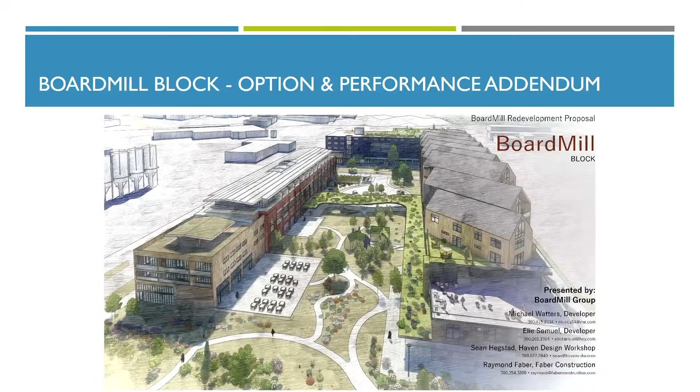So just as a reminder, this is an option to purchase, resulting from the RFP process where we had some submittals and ultimately selected the Board Mill Group. It's a very similar setup of the option framework as we have in other agreements in the waterfront with Harcourt and Millworks, which is actually a subsequent action item on the agenda today.

This one's a little different in that there are 3 distinct phases or projects within this option, covering about 5 acres. For reference, the terminology we'll use is the Board Mill Hotel, the Board Mill Residential, and the Board Mill Park buildings—those are the 3 elements or phases.

This is an option to purchase along with a performance addendum, very similar to the Millworks option we agreed to last year. It has a step-by-step process where the project proponents will bring forward a concept, which comes to the commission, then goes through the city's design review process. Any changes from that will come back to the commission for subsequent steps, until there's finally a final permitted project that goes along with the purchase and sale agreement, at which time we'll consider an actual property sale. I'll walk through those steps in a little more detail in a second.

One piece to consider here is that these projects can be submitted together or in individual phases. We anticipate the initial package submitted will be for all 3 projects, to show how it functions together as a concept. Going through the city's process will likely be more individual, on a project-by-project basis, for the hotel, the residential, and the park building.

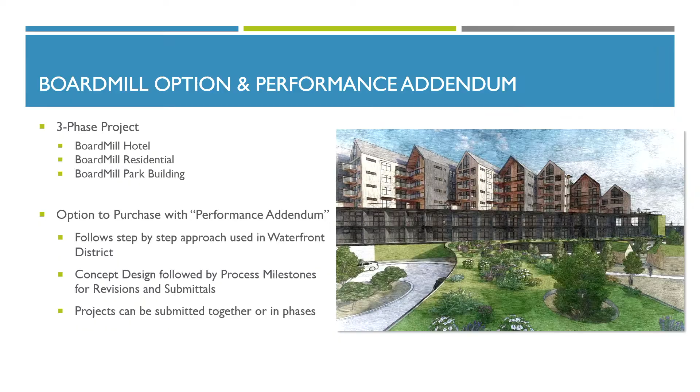And then we've got some timelines that are associated with that, which I'll go through here as well.

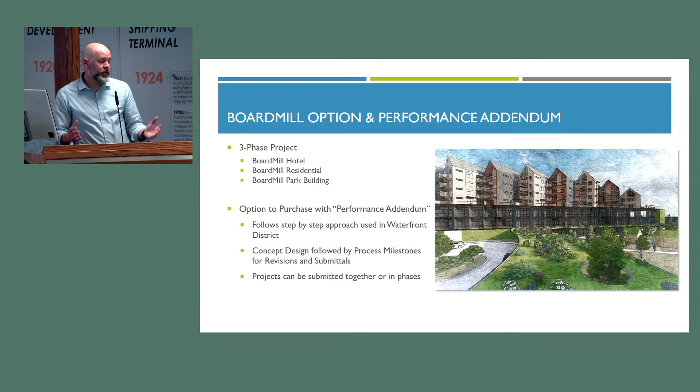So Brian, given that there's 3 phases, are there going to be 3 separate land sale transactions? That's right, that's anticipated. They could be packaged, maybe 2 of them come together at the same time, maybe there are 3 individual sales. But that's the way the option is set up, it has the flexibility to do that. I anticipate some could be packaged, but the timing of the park building, for example, probably has a little more complexity to it. Working with the city, we may have some agreements with the city we have to work through that may change the time frame. But if that all gets worked out and we can do them all together, that's an option too.

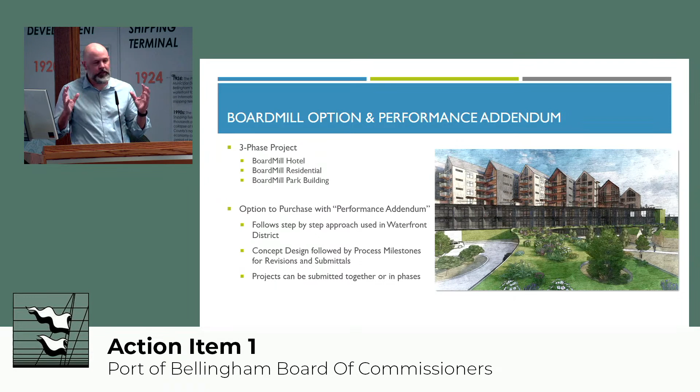So some of the elements included in this are the land valuation. Consistent with the other agreements and appraisals we've had in the waterfront district, we have a $25.50 per square foot value currently, with an adjustment annually at 3%.

The option term is through June of 2027, with the provision that if there's any land use appeals from a third party that's outside of our control or the Board Mill Group's control, that option could be extended for a couple of years, since that'd be outside of our control. It seems unlikely to us. We haven't had any appeals on any of the projects to date, but it is something that could happen through the city's process.

One of the requirements, or agreements I guess I'd say, that we came to was that this was a soft branded hotel. We issued an RFP for a boutique type of hotel. We're trying to avoid a splashy, flashy Holiday Inn feel in the downtown waterfront, but really have it be more integrated in the fabric of the downtown feel we're trying to get. There's a variety of ways that could be accomplished, through an independent operator like Bellwether, or some soft brands that are just kind of subtle, associated with the more major brands. Both of those would work, but we wanted to make sure we're all agreeing what the idea is before we get too far down the road, and that's a piece of this.

There's a $60,000 option fee associated with this. If each project goes forward, that would be credited at $20,000 per project back to the purchase price. But there's a certain date that if the option is not exercised, that would be retained by the port.

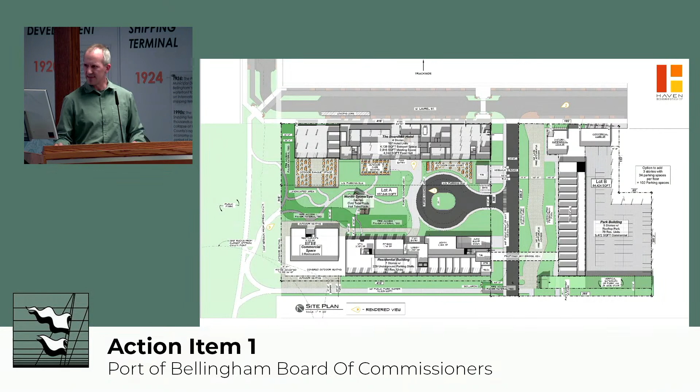So I'll walk it through, starting with the Board Mill Hotel. It's pretty straightforward. The idea is that the Board Mill Hotel is going to be an existing Board Mill building. We're looking at expanding toward the park, and in that expansion area we're putting meeting rooms.

We're putting a banquet hall with about a 300 occupant load, and directly adjacent to that on the outside, we're also putting outdoor areas for gathering, which is a lot of fun. Additionally, in that building we're going to have a restaurant bar, which will also spill out to the courtyard in between the two spaces.

That faces south in general terms, kind of southwest a little bit. We're also going to have a large marketplace, as we're calling it, with some food vendors, craft vendors, and other things. That's going to be about 8,000 square feet, and we're really excited about that piece.

That's going to be directly across from trackside, so you can see that public walk going across there. We'll have access into that area right off of there, so we think that's going to add to the ability to activate that space and activate the port, which we're really excited about.

In addition, the Board Mill Hotel itself is going to be four stories. We're looking at adding an intermediate floor between the current second floor and the ceiling, and then we'll add a top floor, which is the fourth floor. So there'll be about 107 total rooms, and it's just going to be a nice space.

We're looking for kind of an industrial timber feel for the space that matches the area, the location, the history of the site, and we're really excited about that. So that's the first building we're going to be doing.

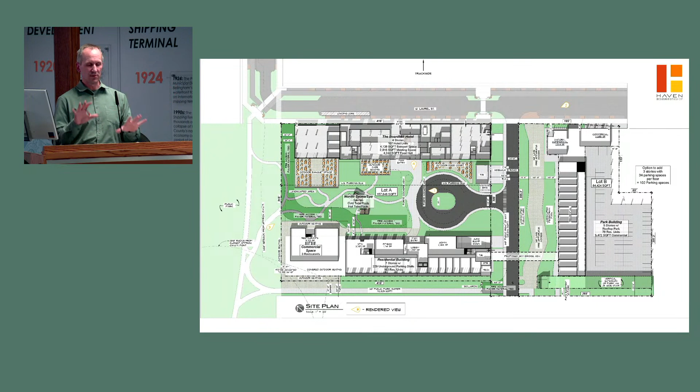That building, plus 9 parking spaces on the roundabout, is going to provide enough parking per city standard for that project without the park building, which was important for us to get underway so they could go separately without problems down the road. We made sure we could accommodate that with our design concept.

The park building is kind of the last building. We will have a sky bridge on the second level over to the residential building for additional parking access, and that will be a significant amount of parking. We have 79 units of apartments, and anywhere from 330 to 438 parking spaces in there.

The best part of that part of the project is the large stair to a public park that's going to be privately owned, privately maintained, but it'll be a public park. That's currently one of the things we need to talk to the Parks Department about, how to structure that and what it's going to look like. But from the talks so far, it sounds like they're okay with the concept and overall idea.

I'm going to continue on to more slides. Before you leave that - are there no parking requirements for the hotel?

Yes, but we can accommodate that underneath our residential building. So you don't have to put in parking for a hotel, but... You do? Yes, for the hotel, I'm just saying there's sufficient parking on that portion of the site for both buildings. So for the city requirements for the hotel, you need half a car per room.

That's their standard. We don't think that's enough, but that's why we're building additional parking for other things. We will meet the city standard with that requirement, so that's around 50 spaces for the hotel at minimum, plus those needed for the residential - about 170 some spaces additional.

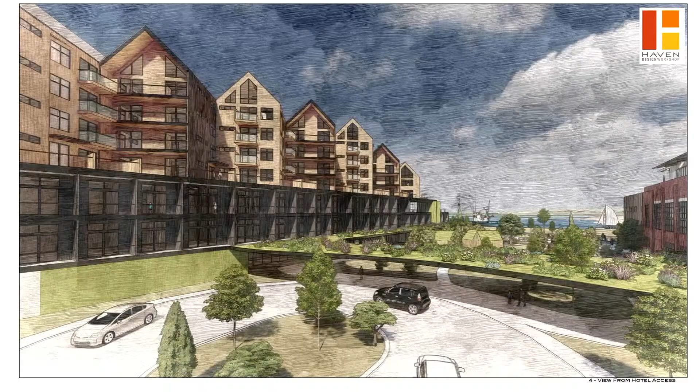And 0.75 parking spaces for the studios? Yes, these might be more realistic at that. And here's some renderings, so you can see the residential building there, the porte-cochere between the two structures, a nice drop-off, dry area. We're gonna plant that quite well, and then you can see the water and everything else beyond.

Are you going straight to condo with those, or apartments first? No, we will not. There'll be apartments.

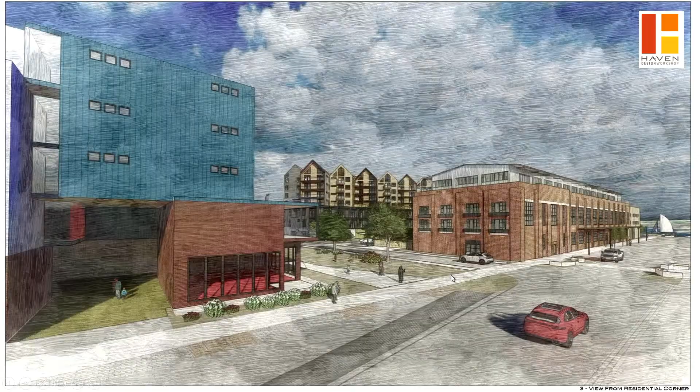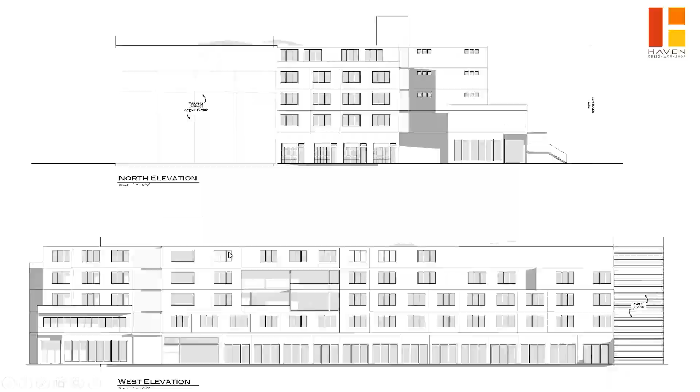Here's another view from the street, and we're looking at the hotel building, the residential beyond, and then the park building. Initially we were looking at doing the access to parking here. We're probably going to change that with some discussions, but we haven't finalized those. We just feel it's too tight and too close to the railroad tracks.

Otherwise we would have to do a right-in, right-out right next to the train tracks, and we felt there was too much conflict there. The city did not say it was a problem, but the more we thought about it, we don't think that's the best option going forward.

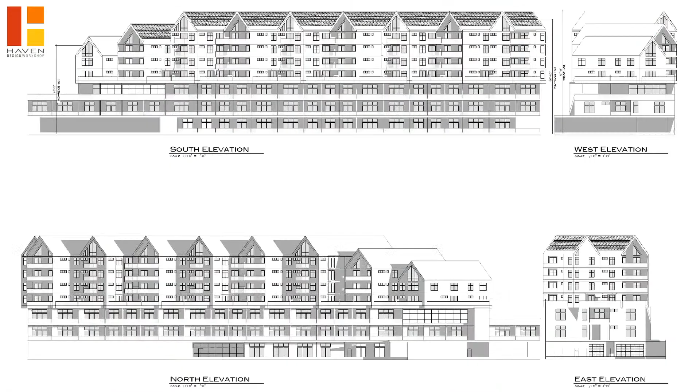So that's just a general overview, and I think that's the end of the slideshow. If you have any questions, or like, go sit down.

So in the board mill building, you're going to get 4 floors, 3 in the existing building. How are you going to deal with what looks to be a problem with the windows on the 3rd floor—you'll either have a short ceiling height on the 2nd floor? That is correct, yes, it's going to be around 8'6" ceiling in there. Okay, so not too bad.

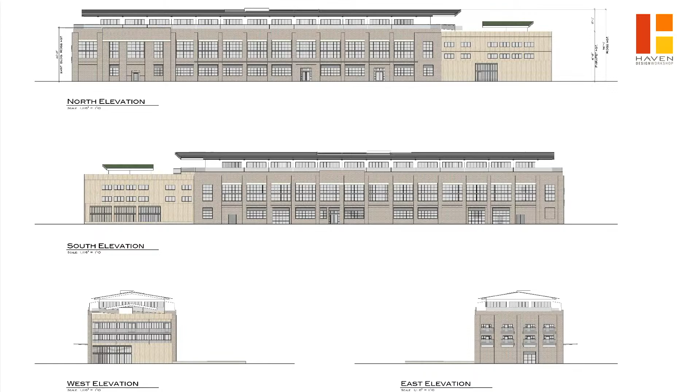Yeah, there'll be an intermediate—let's see if I can show a picture of that. You can see lightly there's an intermediate line going through there that's going to capture that. So there'll be kind of an industrial window system, sometimes with a horizontal line and sometimes a vertical line where walls intersect it. We're looking at maybe channel steel or something exposed on that end. Yeah, it's not as high as we'd like, but trying to work with the structure and keep costs reasonable, we're going to keep it at that point.

And for the restaurant, in terms of public spaces people can use for restaurant, bar—run me through those again. There's the food court. Yeah, the marketplace, which is about 4,000 square feet, will have food vendors. We're looking at a variety of vendors as options, and we may also have craft vendors, artisans, and other things going on there. Let's go back to the site plan, I'll show you.

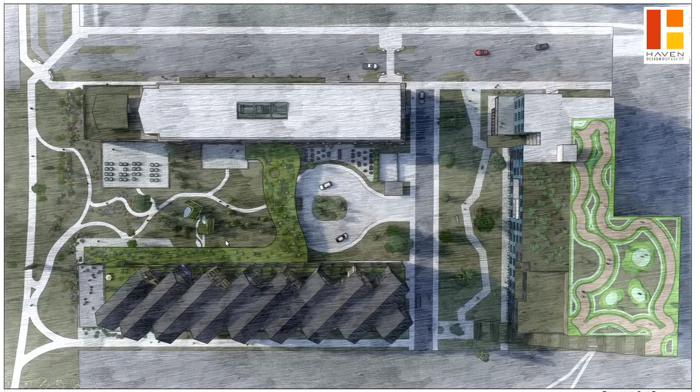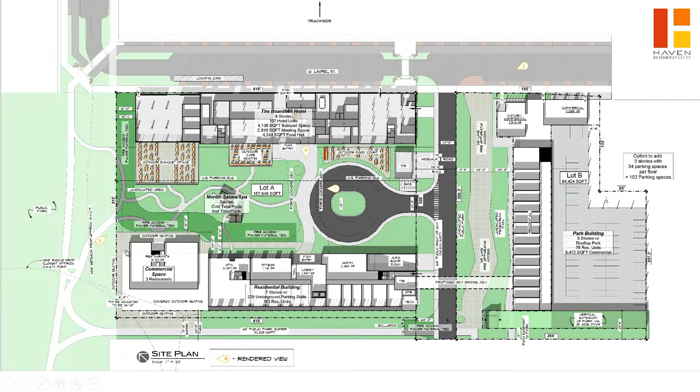So this is outdoor eating space for that marketplace as well, facing south, which is a really nice outdoor space. The restaurant inside the hotel itself will have an enclosed space here, with a potential spill-out area on the hotel building. There'll be additional space on the residential building that's not finally programmed, but there may be restaurant or other items we're going to put in there.

Any other questions or comments? It's just nice to see that the residential part is taller than the board mill building, so you get a little protection from our predominant weather in the wintertime. That'll be nice for folks in the courtyards there. But other than that, it looks pretty exciting.

All right, thank you. Thank you.

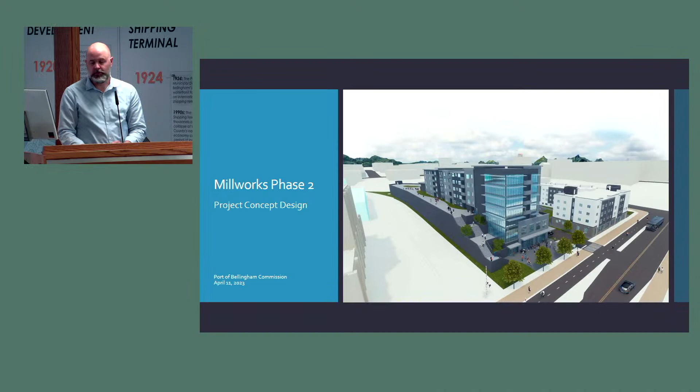I'll start to walk through that. This is for the Phase 2 project concept design, which was submitted to us on March 31st by the Millworks group, another great group that's been good to work with. We met with them multiple times on their design team about how they're incorporating some of our initial comments on things we had concerns about, which they've really addressed. I'll talk about some of the elements they've included in this concept.

As a reminder, similar to the purchase option we just went through, they have a phased approval process, as does Harcourt. The first submittal is the project concept design - that's where that yellow star is, that's where we are right now. So it's for early first concepts, but ready to start working with the city on their design review and land use permitting. The first action pending commission approval is that we would issue this authorization to proceed.

We would work with them on a site access agreement so they can get in there and start doing more design work, getting their geotechnical work, their civil survey, that kind of thing. They will then also submit a land use application and design review package to the city of Bellingham, which includes the city-led public process. Once they've gotten their comments back and any revisions made, they'll come back to us with a more detailed project development design submittal.

Once that is approved by the commission, pending commission approval, they'll move forward with more detailed building permit applications. When those come through and they have final permits in hand, and their financing in place, then we would move forward on a property sale. So very similar to what we just talked through with the Board Mill group.

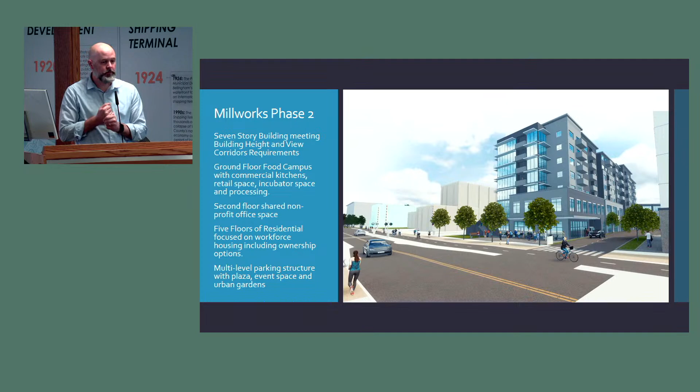So a multi-level parking structure that also has a plaza on the top, publicly accessible, with event space for weddings and other things that can spill out there, and some urban gardens that can be used by the food processing campus or even by the residences. Going back to one of the first renderings, you can see that plaza could have a spill out over the railroad tracks, and a staircase that comes down to access Laurel. Another exciting and unique design starting to pop up in the waterfront district, which is really cool to see.

So this is just pending Port Commission authorization. We'd issue that authorization to proceed. Within 120 days of that, they would be required to submit their submittal to the city, and they're pretty close on that already. That'll be a city-led process, and subsequent deliverables will come back from those steps. Final occupancy, per the option, is December 31st of 2027. We've met multiple times, and they're on track with that. They think that's a totally achievable timeline for them as well.

So with that, staff recommends approval. This is something we've been working with them on. It's consistent with things we've asked for. And again, a great team to work with. So with that, I'd be happy to address any questions.

Okay, thank you Brian. Commissioner Bell, do you have any questions or comments?

Just one on the commercial space below for the food campus area. What's the route that delivery vehicles would use? I envision that the trucks would be larger in size and that it wouldn't be just your normal traffic pattern.

Yeah, that's a great question. If you recall the original food campus concept, it was a much larger food campus. This is more like demo kitchens and commissary kitchen space, less of the larger semi delivery. That was the limiting factor here - there just wasn't space for any kind of semi access.

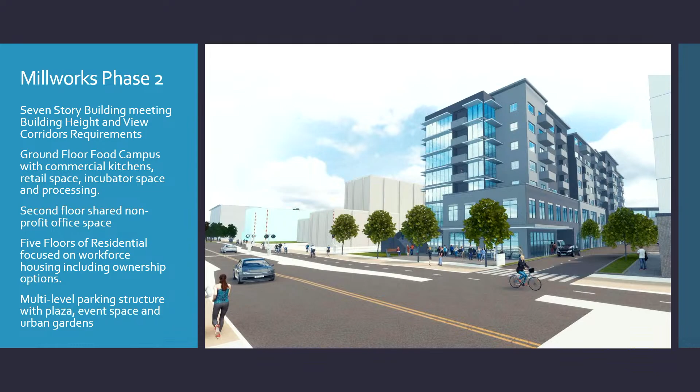Yeah, so you're looking at maybe a 20-foot box on the back rather than a 40-foot. Wouldn't necessarily go through. They could do some things with timing - you see that a lot in the more busy areas. There's larger grocery stores in downtown Seattle that get deliveries, but they just have to time it right. If there's a need for that, I'm sure they could figure some of that out with timing.

Yeah, you can imagine especially with restaurants you're going to have beer deliveries, and those trucks aren't small either, so having commercial size access matters. That would be my only feedback - I'd like to see smooth flow because that could really tie up traffic if you've got a truck sitting out there in the middle of the street delivering rather than having a protected place to pull in.

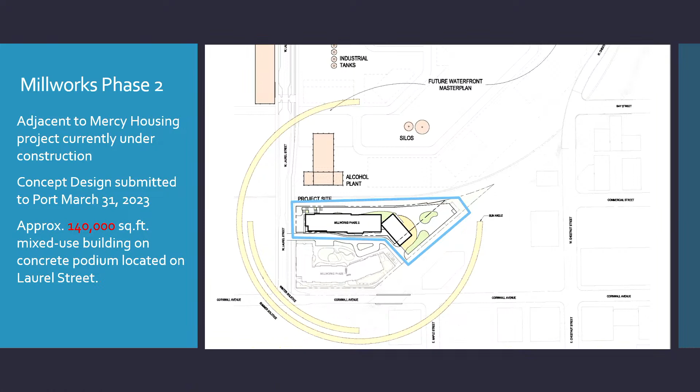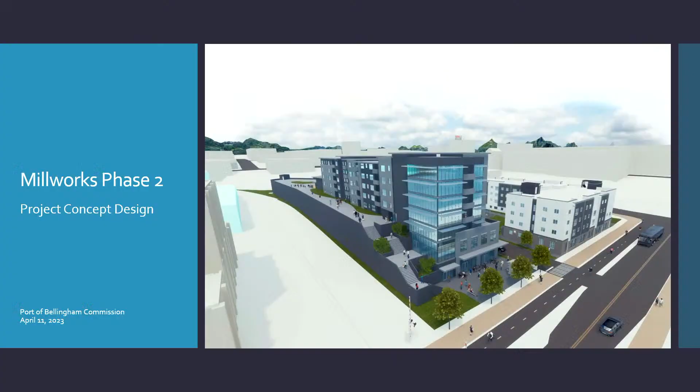And then just from an aesthetic standpoint, how does this compare to what we just saw with the hotel? Are we consistent with our architecture? It's not going to be vastly different. I was personally pleasantly surprised by this, I think it's beautiful, I think they did a really good job. The glazing there on the front end kind of defines that corner - it's a gateway entry to the site. Since the Mercy project is a little smaller than we had thought on that corner, this actually stands out behind it. It's also at the scale of the alcohol plant on the other side of the track, so it does fit with the space.

Personal aesthetics are everybody's own choice, but the color scheme is just a placeholder for now. It does a good job representing the gateway entry to the site. And love the stairs - but given the fact that you've also got a gym across the street, you realize what those are going to be used for. Most mornings, it's going to be a lot of traffic.

Okay. Commissioner Briscoe, a couple questions, Brian. Could you bring back up that rendering you just had up there? I'm having trouble getting the picture. There you go.

So that street we see with the cars passing in the front there, what street is that? That's Laurel Street, and this is the corner of Cornwall here. So this is the cycle track, the green track, and the PSE Encogen is on the far right of this photo. That's Laurel Street.

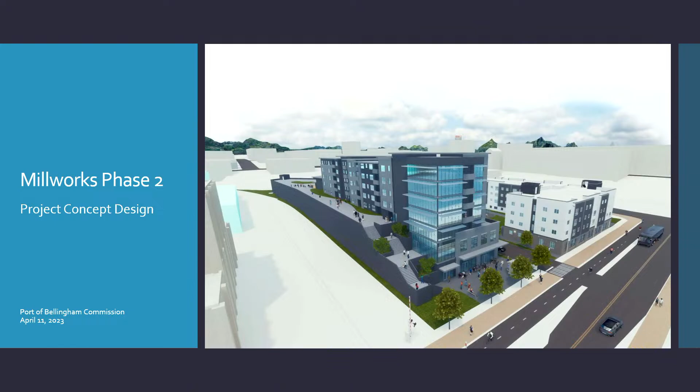Same parking constraints as the hotel, basically 0.75, same parking requirements. That's kind of one of those arguments we're having in the waterfront district - we adopted more restrictive parking requirements to bring cars off the route and make it more pedestrian focused. But then for operational purposes, that can be a problem. So both of these projects have done a great job of stepping up to figure out a creative way to provide that parking without just having giant surface parking lots. So it kind of feels like it's working.

Yeah, and by 2025, 2028, there'll probably be a lot reduced automobile traffic anyway. So it'll take care of itself.

Well, I'm really excited. We've asked several times about the variety of construction and development we'll see, and I think we're seeing it here in this project. We've seen a lot of residential proposed and in process, which is good, but this is bringing in a different element that's going to activate space differently, activate jobs differently, and give people a different way to live and work down there, between the office and these commercial spaces. It's really providing a variety, which I've been looking for and heard other comments about as well. So I'm excited about that.

Yeah, I agree. I think both of these projects we see tonight have done a great job thinking through the programming - not just building residential only and letting retail fill in later. They really are thinking about the programming of these spaces. I think the RFP of the hotel was kind of port-led; this one was developer-led, and they've been consistent with the concept and kept carrying it through. So I think that's a big part of what we're seeing with some success down there.